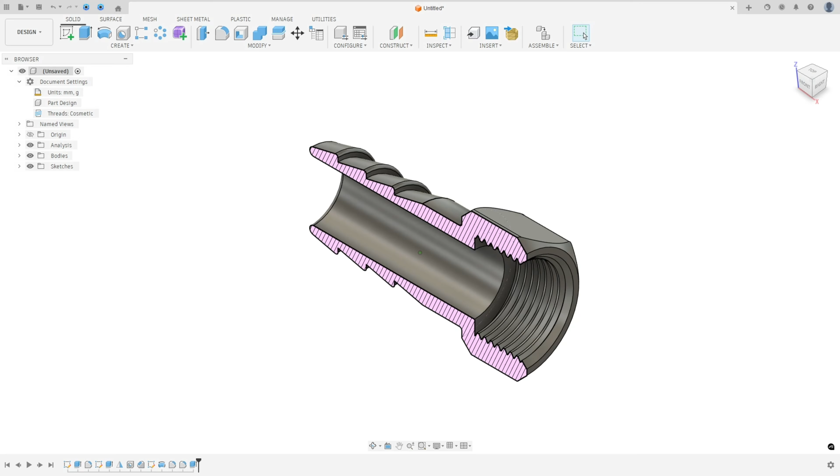Let's create one more tutorial in Autodesk Fusion. In this video, you'll learn to use the Extrude, Fillet, Mirror, Hole, Chamfer, and Revolve. So open Fusion and let's go.

The first step to create this part, we will select the right plane and create this sketch. Here will be the midpoint. The first thing we'll make is this hexagon, and the distance between this line here and this one is 25 millimeters.

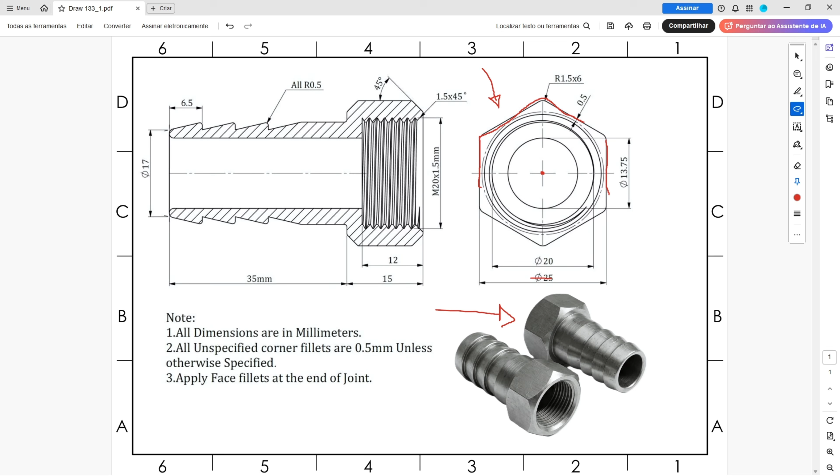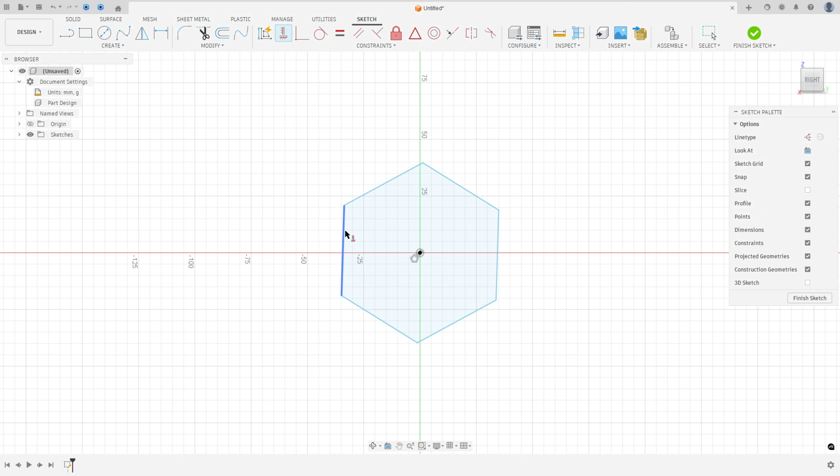So open Fusion, go to create a sketch and select the right plane, go to create, select the polygon, circumscribe the polygon, click here in the midpoint, make a polygon here, and go to constraints, select horizontal vertical, select this line and go to sketch dimension. The distance between these two lines is 25 millimeters.

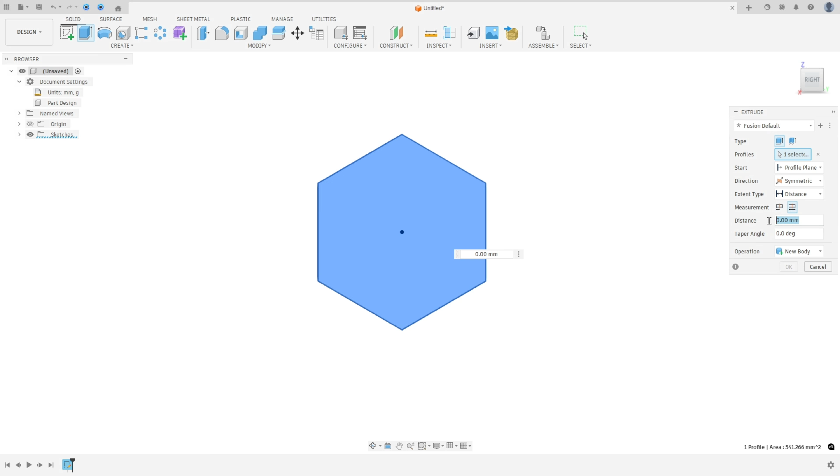We needed to extrude this, so finish the sketch and go to extrude. We needed to extrude this 15 millimeters, the distance between this face here and this face here. So the direction, select symmetric, measurement whole length, and the distance here 15 millimeters. Operation on new body and press OK.

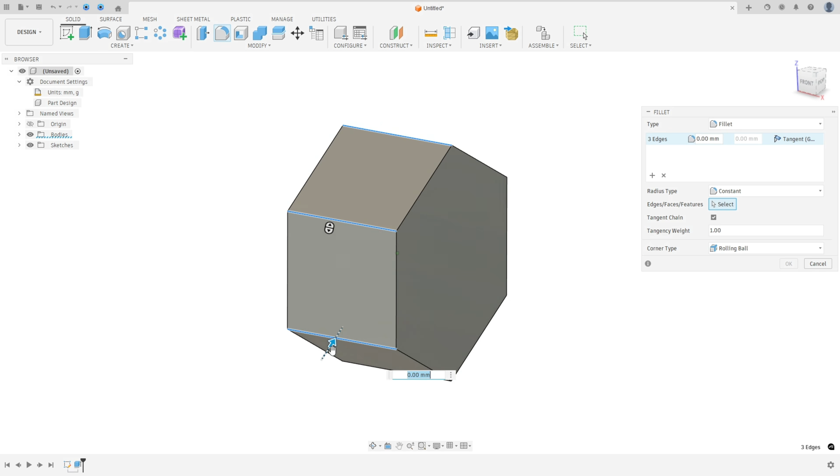Now in the edges here, we'll make a fillet with 1.5 millimeters of radius. Go to fillet, select this edge here. The radius here 1.5 millimeters and press OK.

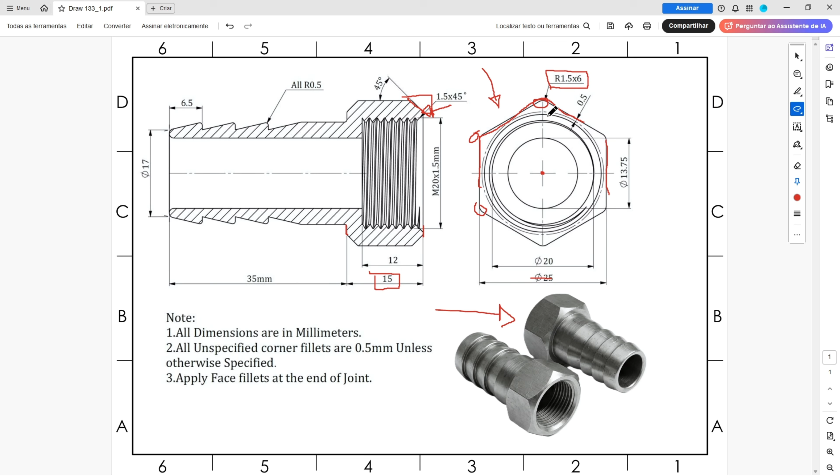And now we will create a chamfer here, this chamfer. But to create this chamfer, we will select this face here and we'll make this circle. This circle is this one, okay? We have the same on both sides. The distance between this circle and this side here of the polygon is 0.5 millimeters.

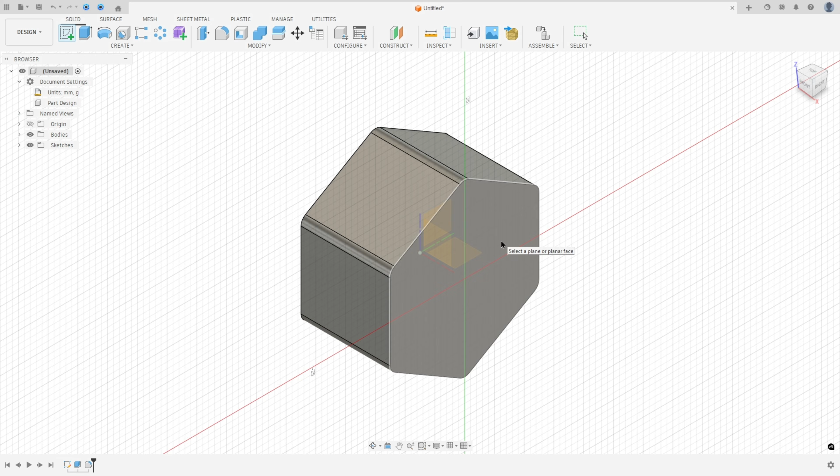So go to create a sketch and select this face. Select the circle, click here in the midpoint, make a circle here, and go to sketch dimension. Click here with the right button and select pick circle/arc tangent. Select this circle and this edge here. The distance here is 0.5 millimeters and press OK.

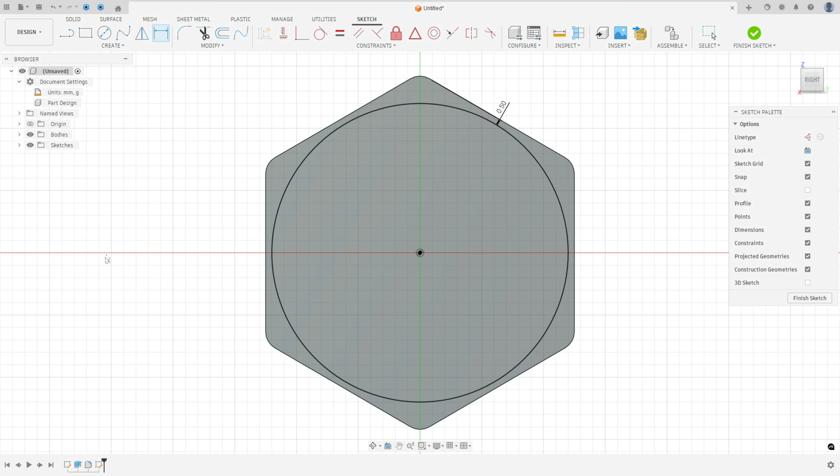And now we'll make a cut with a taper angle of 45 degrees. So finish the sketch and go to extrude, select this circle and the distance here minus 20 millimeters and the taper angle 45 degrees. But here the operation will be intersect, and press OK. We made this chamfer here.

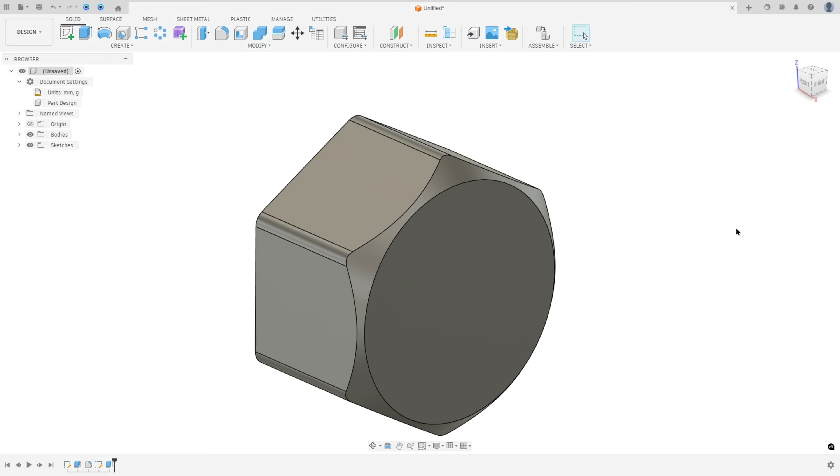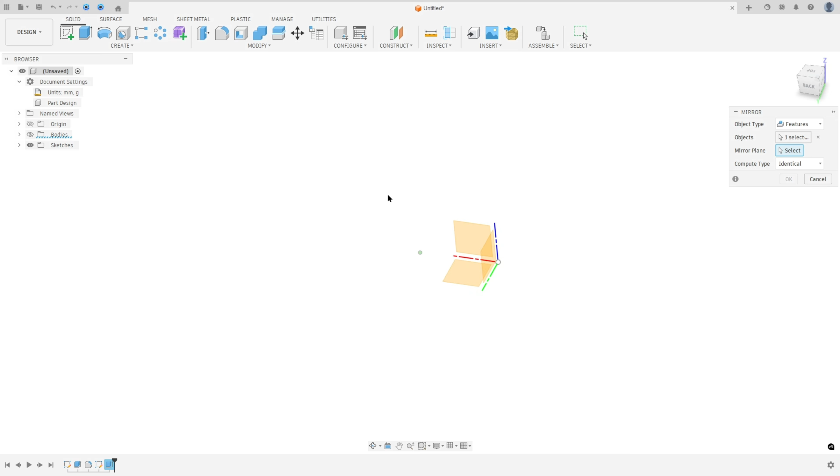Now we needed to create the same but on this side. So to create this, go to create and select mirror. The object type, select features. The object, select this extrude. And the mirror plane, select the right plane. And press OK. We made the same on both sides.

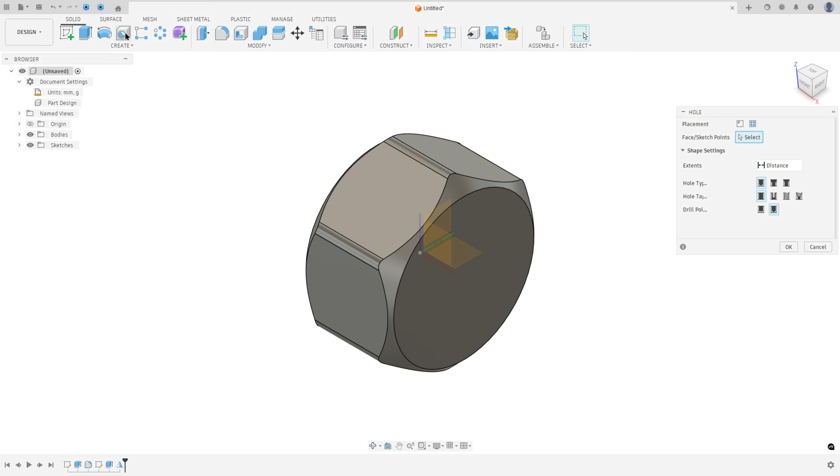And now we will create this hole with thread. This hole here is M20, 1.5 millimeters, and the depth here is 12 millimeters. So go to hole and select this face. And for reference, select this circle. So it will make this hole in the center of this face.

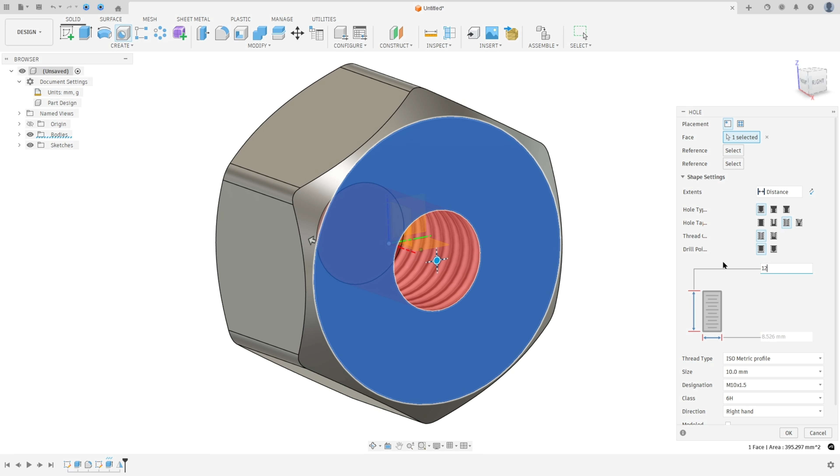The extent, select the distance. The hole type, simple. The hole tap type, select tapped. And the drill point, select flat. The distance here is 12 millimeters. And the size is 20 millimeters. Designation M20, 1.5 millimeters. And press OK. We made this one.

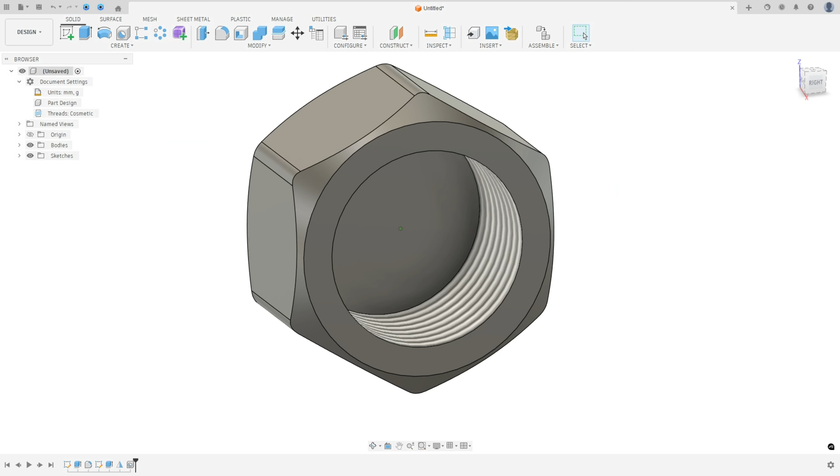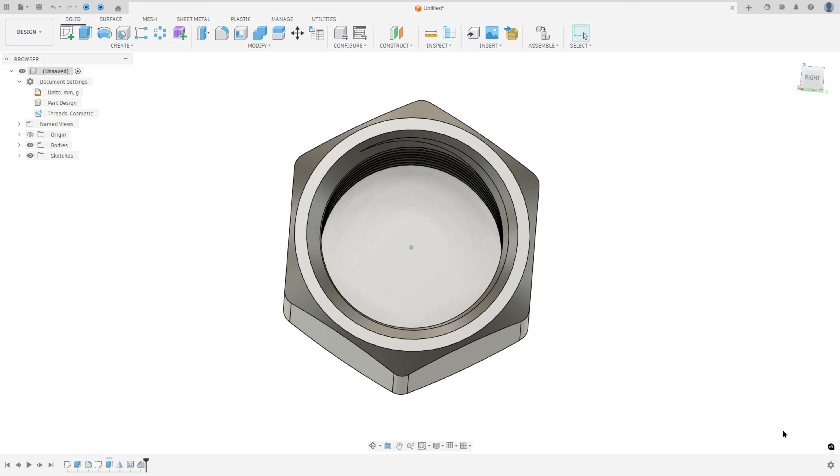And now we will create this chamfer here. We have a chamfer here with 1.5 millimeters, this chamfer here, okay? So go to modify and select chamfer, select this edge here, the distance 1.5 millimeters, and press OK. And now edit this hole, double click here, and here we will select modeled and press OK. We made this one, okay.

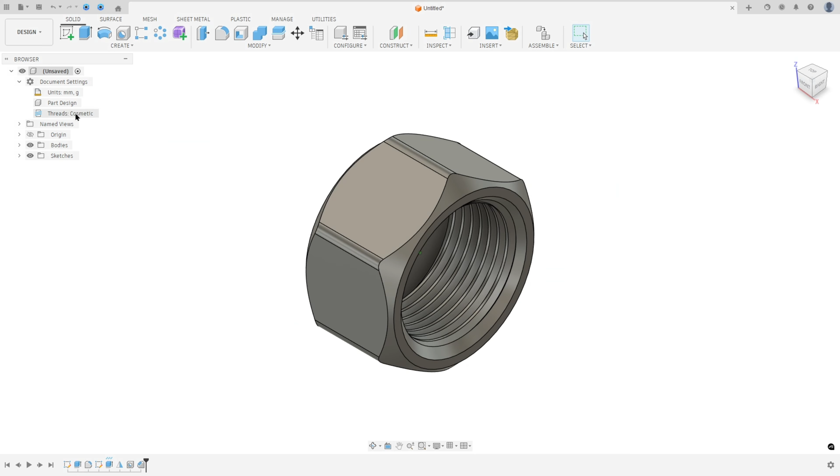And now we will select the front plane and make this sketch, and we'll make a project of this body. Go to create a sketch, select the front plane, go to create, project include, project, use the selection filter, select the body here, and press OK. I will hide this body a little bit.

Now select the line, a construction line, click here at this point, and make a line here with 35 millimeters of length, okay.

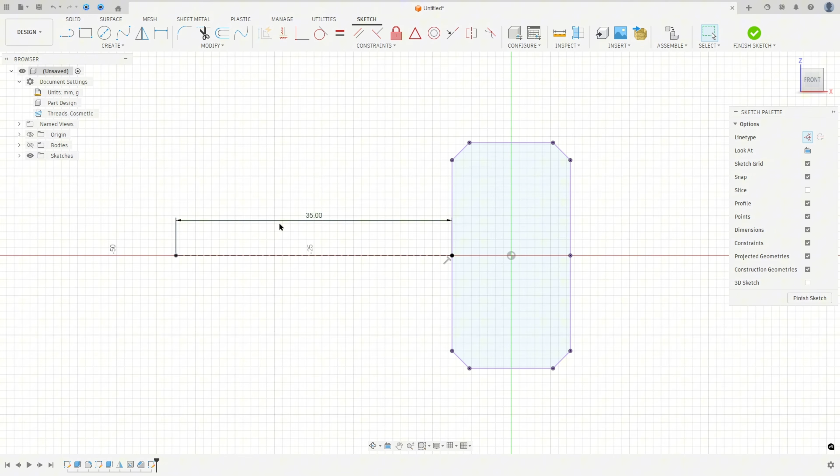And now we will create this line and this line here. The fillets in this sketch we'll make later, okay. The distance between this line here and the center line is 13.75 over 2, and the distance between this point here and the center line is 17 over 2.

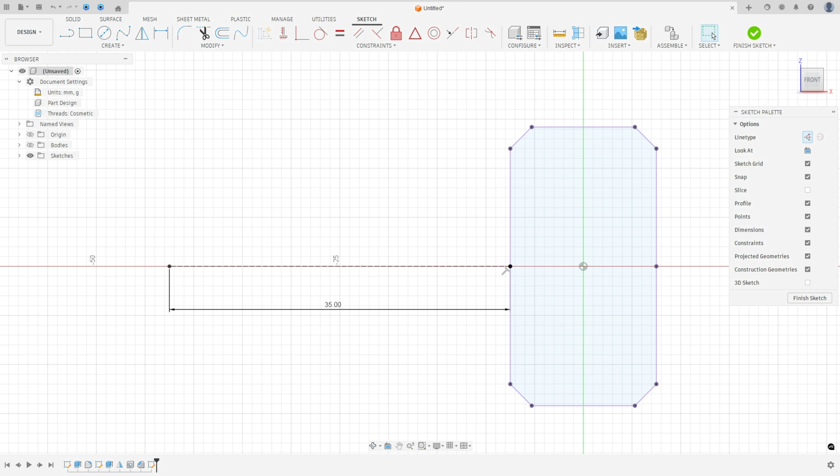So select line, remove the construction line type here, make a line here, and make another one here. Go to sketch dimension, select this line and this one: the distance here is 13.75 over 2, and the distance between this point and this line here is 17 over 2. Go to constraint, select horizontal vertical, select this point and this point here, okay.

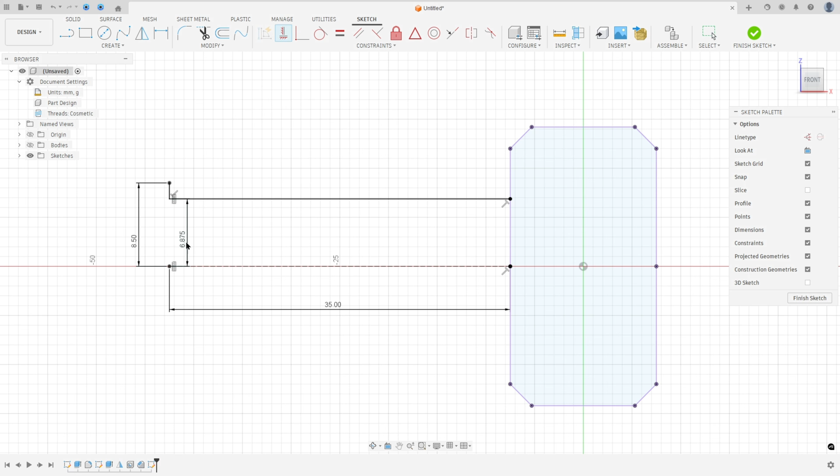And now we will create this line here. Or first, let's create this line here for reference, okay. The distance between this line here and this one is 20 over 2.

So select a line, click here, make a line here, and go to sketch dimension. The distance here is 20 over 2, 10 millimeters, okay.

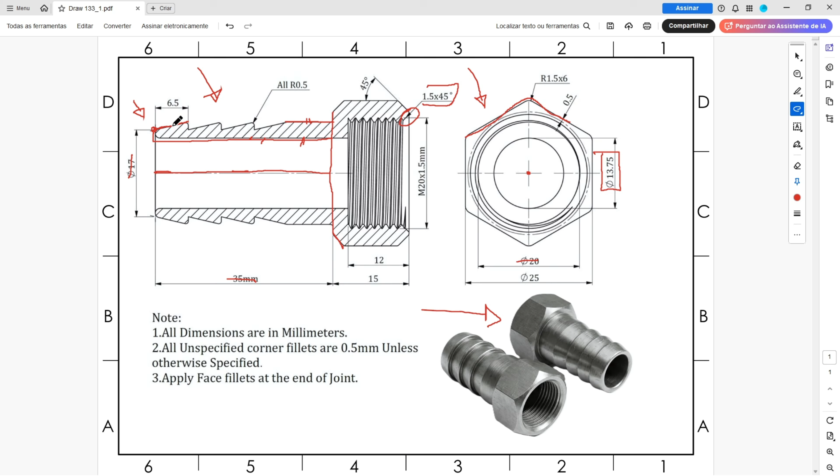And now let's create this line. We will create a line here and another line here. The distance between this line here and this point here is 6.5 millimeters, and this point here is horizontal with this point, okay.

So select line, click here, make a line here, sorry, make a line here and a line here. Go to sketch dimension: the distance here is 6.5 millimeters. And go to constraint, select horizontal vertical, select this point and this point here, and this point and this point here, okay.

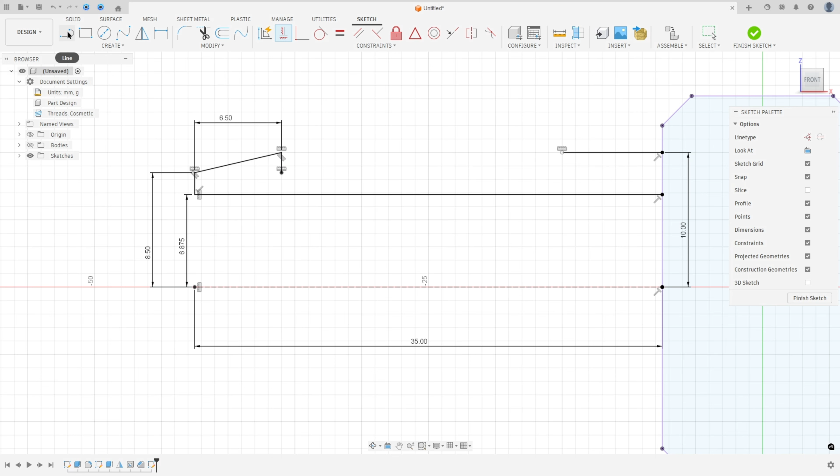Now we'll make this twice more here. So select a line, make a line here, another line here, and make a line here between this point and this point here, okay.

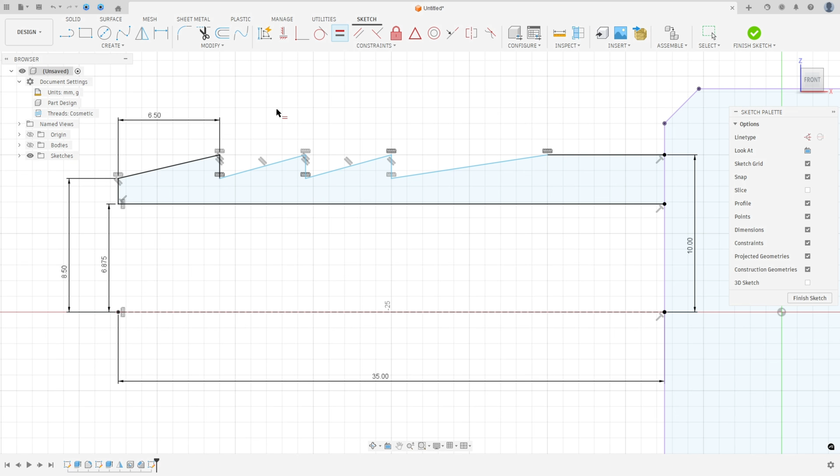Go to constraint, select horizontal vertical, select this point and this one, this point and this one. Now select this point and this one, this point and this one. And go to constraint, select equal, select this line and this line here, this line and this one, and select this line here and this line here.

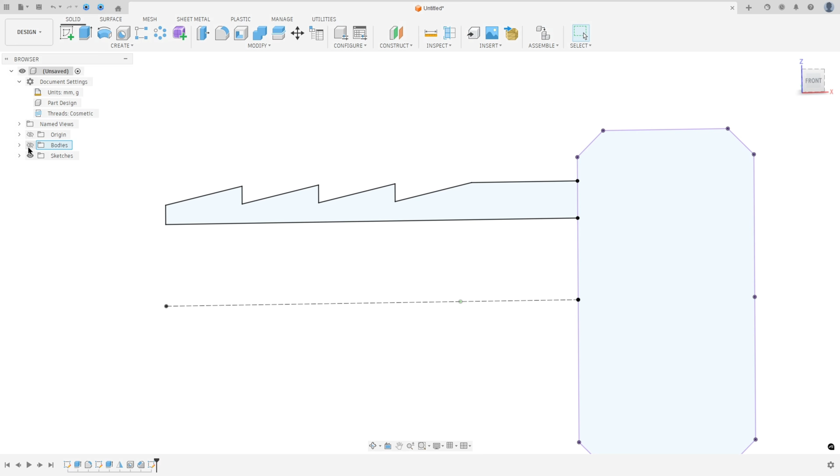We made this profile, so finish the sketch. And here, show the body here and go to Revolve. The profile, select this one, and the axis, select this line here. Operation join, press OK. We made this one.

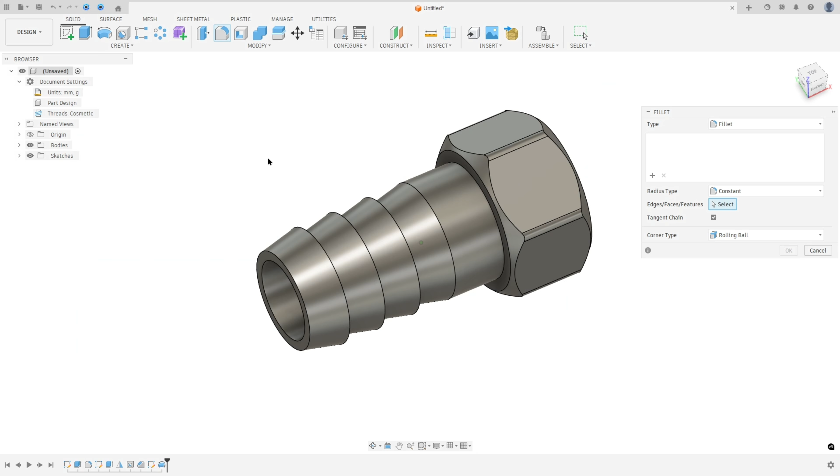And now we will make some fillets here. The fillet here is 0.5 millimeters, and we have a fillet here. The fillet here we use 0.5 millimeters, okay. So go to fillet, select this edge here, select this one and this one, 0.5 millimeters, and press OK.

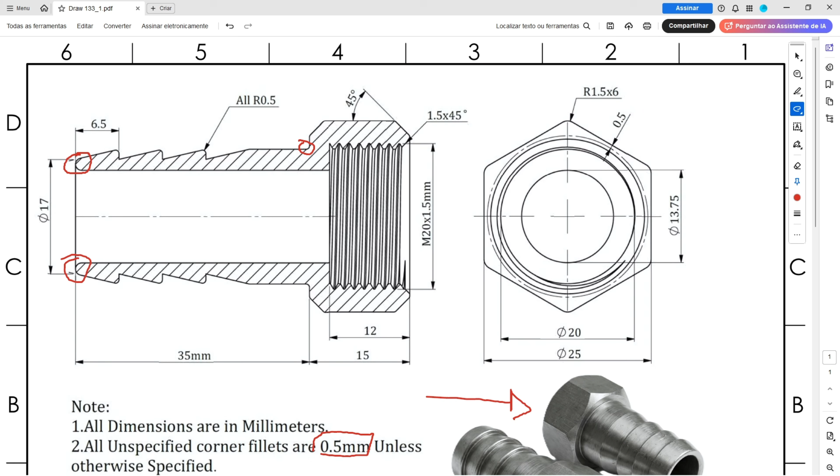And now we will make this fillet here. It is a full round fillet. So go to fillet, the type here, select full round fillet, select this face here, and press OK.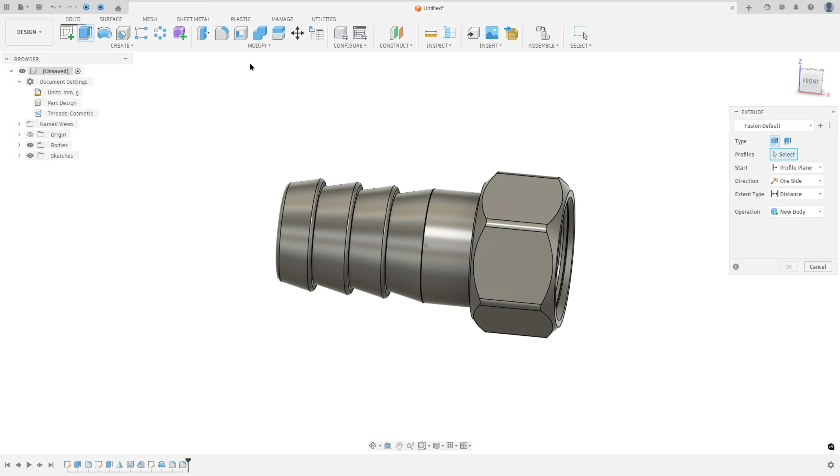And now to finish this exercise, we need to create a cut here in this face. So go to extrude, rotate this, select this face here, and move this minus 5 millimeters, operation cut, and press OK.

Let me make a section analysis here. And that's it, and here we finish our exercise.